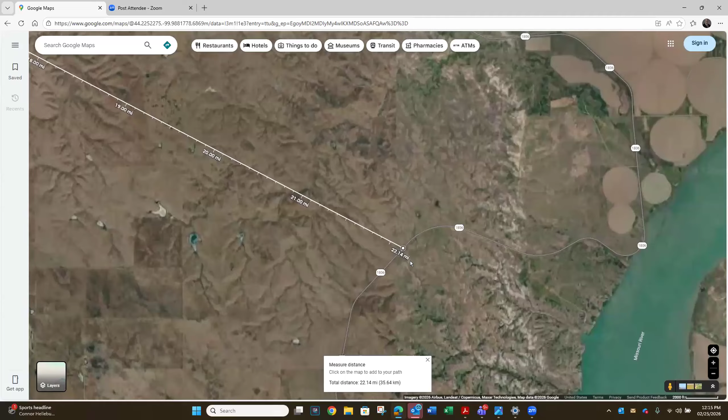The problem with what I'm about to show you is where we put this—what we call a Wyoming snow fence, because we adopted it from Wyoming—is in a location where we don't have data, which engineers desire to justify the cost for a project. It really came down to maintenance sharing with us that this continues to be a problem area. South Dakota 1806 comes south out of Fort Pierre and continues southeast. There's an area I'm zooming in on, and I'll show you where our physical snow fence went in, where staff continued to tell me it was presenting a tremendous problem for them.

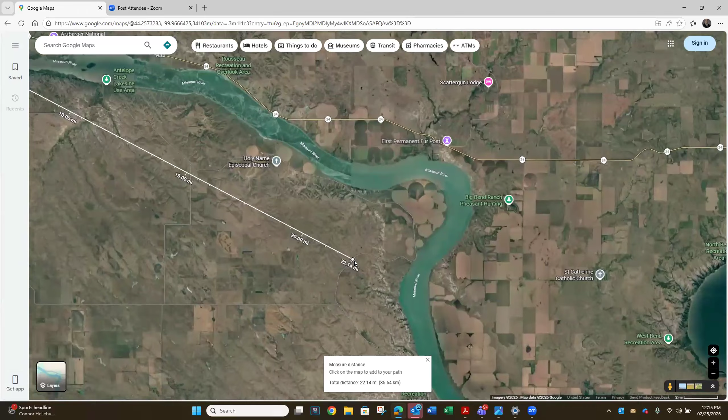The route they run, I'm zooming back out, hopefully slowly and not making you dizzy, is about a 50 mile one-direction route, one truck, one snowplow. This is about mid-span on that route where I'm zooming in. What would happen is not only could you not handle two-way traffic, they couldn't even handle one-way traffic—it would blow shut, much like Danny said. So we had stranded motorists here.

Part of my job is to help folks like Jared get all the toys he needs: a six-wheel drive snow plow, a road grader, different chemicals like magnesium chloride or calcium chloride, or we work with a farmer to put up snow bales here this winter, or pay a farmer for corn rows for drifting, and we do an agreement.

This location I'm zoomed in on was really handicapping our crews. We were spending tremendous time in this roughly 1 mile stretch, and it was killing our ability to service the rest of the route. So part of my job is figuring out how to help staff get up and down the road so they can serve the most customers.

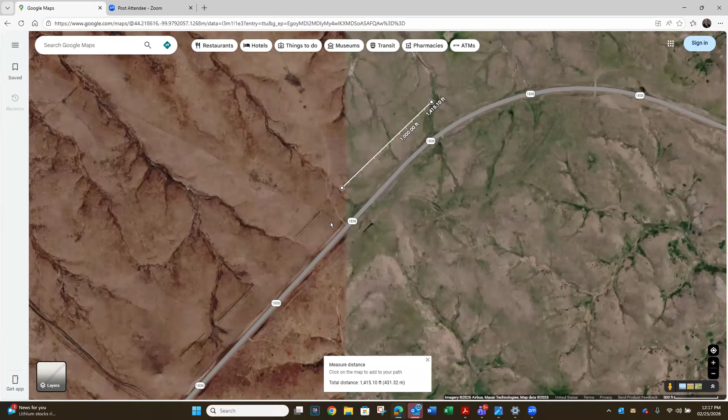What you're seeing in plan view, I'll trace it here, is the fences. I'll zoom in so you can see them up close. This is one stretch of physical snow fence we put in. We started working with the Lower Brule Sioux tribe, who were strong advocates and proponents to work with us since it's land they own. Danny Varlick, who introduced this presentation, helped me by evaluating wind direction and how it channels through.

Zooming in, when we would actually get folks stuck, there were half a dozen locations that would drift solid. If you look at the height of the road to the right versus the left, this would be extreme solid snowpack.

It took us 2 years to bring it to fruition, but we built what we call the Wyoming snow fence, based on wind direction and locations where Danny evaluated the contours would be a good angle to intercept it. Danny, I'd like you to correct me or affirm what I'm about to say.

Typically our drifting ratio is about 250 to 1, so it was also critical to study the contours and the offset. True, Danny? That is correct. Just an interesting point there.

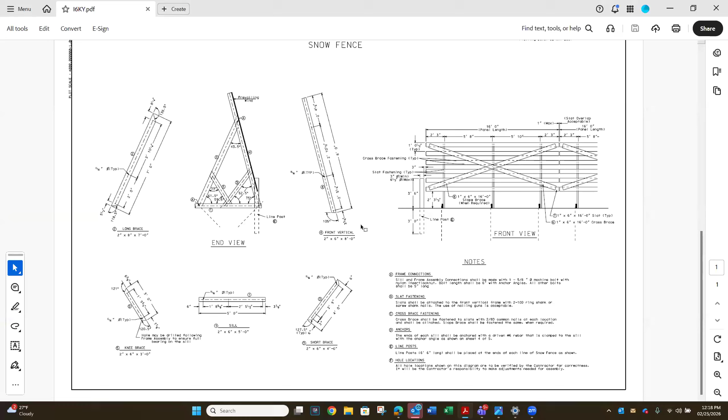I'll show you a close-up from our plans. This is actually a very simple A-frame that's 8 foot tall. We let it to contract, and we had to secure the right of way to do it. The Lower Brule Sioux tribe was wonderful to work with, and strong advocates to help patrons get to and from home.

Going back to the big thing you saw: this snow would pack in here so hard that all the toys we'd give our maintenance crews, we were ramming it with a 6-wheel drive, ramming these areas with a blade and not able to get through. I'll show you a photo.

Danny mentioned 2022. This is how hard-packed the snow is. I am not a small guy, but I won't say I'm huge — I am 6'3", 230, and you can see the indentations I'm leaving on the snow. That's the exact same spot and the butte where our snow fence stopped.

For us, the results were immediate. We had a tremendous 2022 blizzard, and we got this in just prior to the next season, and it was crazy how positive the ramifications were of the snow fences. Now the drifting was massive, and one of the things they wanted me to comment on was pros and cons. We put a perimeter fence around because these are pastures farmers rent.

But the drifting was so extensive it actually crushed the perimeter fence, such that cattle came in and started rubbing on our Wyoming snow fence. Crazily, they broke a good 20-30% of the members, and our maintenance forces had to go out and reestablish them.

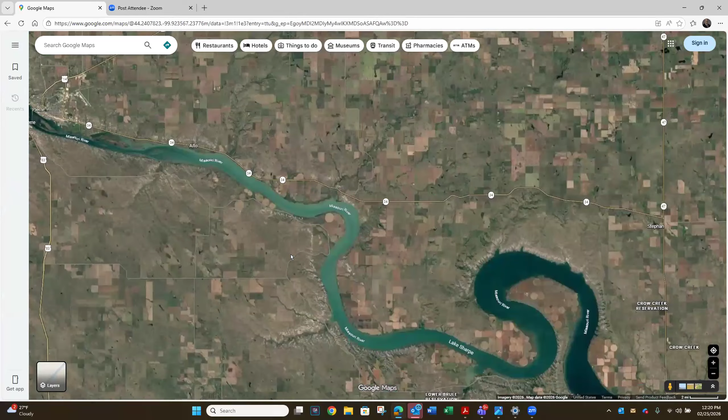The last thing I'll mention is this isn't something common to me — I'd say in western South Dakota they use these wooden snow fences fairly prevalently, and obviously Wyoming is the name we stole it from. I've seen them out there a lot. Another consideration, and I'm about wrapped up here: we have another location where we had tremendous stranded motorists as the snow flies. This is US 83 to the left.

We wanted to do a living snow fence at the location I showed you. But the problem was the soils along the river were so terrible that when we talked to agronomists, they said it would be very infeasible to try to maintain a living snow fence in these heavy clays deposited along the river.

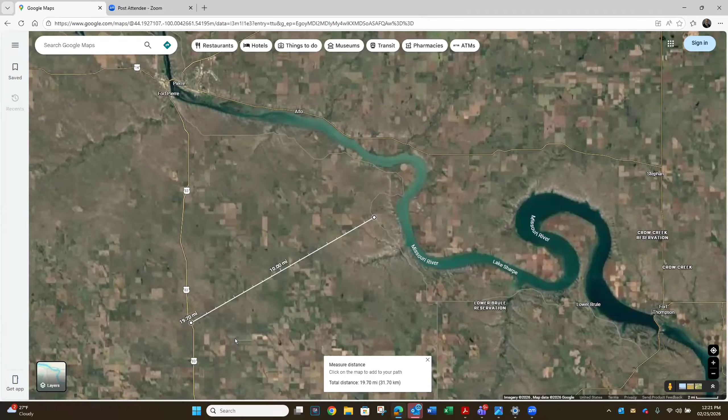As you see, by line 20 miles by the crow flies, soils have changed dramatically. This coming summer we have worked on this, and Danny has helped me with this as well. We'll be putting roughly 4,000 feet of living snow fence.

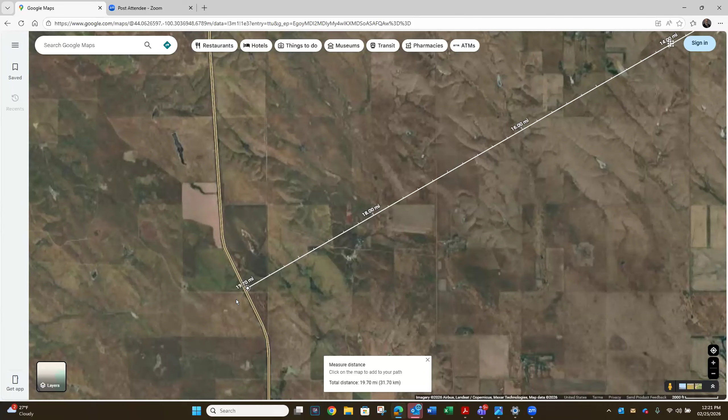I've worked with DNR and a local conservation district, who will install it. Our maintenance forces will water it. The cost of the living snow fence will be around $20 a foot for roughly 4,000 feet. Our wooden snow fences that I first showed you in 2022 went for about $80 a foot, so that gives you some comparison.

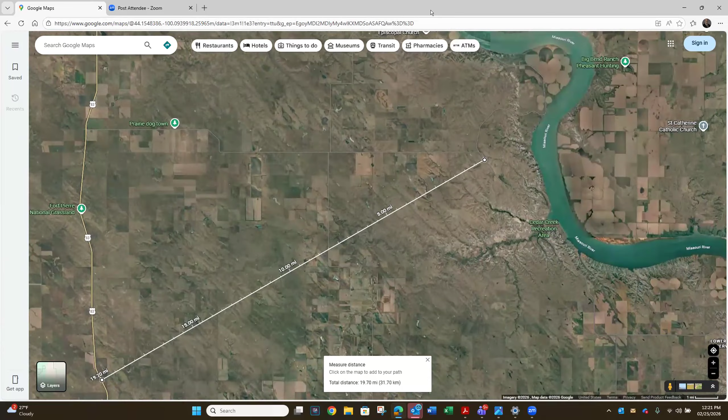Again, it's really just trying to help maintenance forces do the greatest impact they can by getting up and down the road. So that's the extent, very quick and dirty, of the snow fences we put in. I'll turn it over to Jared Fosham, maintenance supervisor in Hayes-Phillip.

Dean, while Jared's pulling up his PowerPoint, we did have a question that makes sense to ask now. In that discussion you mentioned a 250 to 1 ratio, and someone's wondering what that ratio represents. It's basically the rate that snow drifts.

If you put the snow fence too close to the road, these are long, flat slopes because they're normally wind induced. So if you have an 8-foot tall snow fence, for every foot vertical, the drifting is going to go 250 feet horizontal. When Danny helped us set the distance away from the road, that was taken into account, so you don't have a massive snow fence so close to the road that drifting actually goes over the road instead of stopping prior to it.

Yeah, and Dean, I can add to that. Typically the design standard is 35H to your center line. With the amount of snow and how far it carries with nothing to protect it, we had to redesign this one, because if I'd just used the normal height and normal calculations, we still would have had some issues.

This one I took on my way to work, I've got a 26-mile commute in the mornings. You can see the road surface is actually pretty good, but this is a bridge right here where it drifted in. Just as you guys are aware, even getting to work can be a challenge some days.

To me, visibility is the most dangerous part of blowing snow. Snow and snow drifts on icy roads are something you can deal with, but it's hard to deal with things that you can't see.

Thankfully, there isn't a lot of traffic out when conditions are like that, but there's still people there. There's been times when visibility gets poor like this where we have pulled our plows off the roads. Me personally, I leave it up to each individual driver, as they know their conditions, they know their capabilities and their comfort level when out in these conditions.

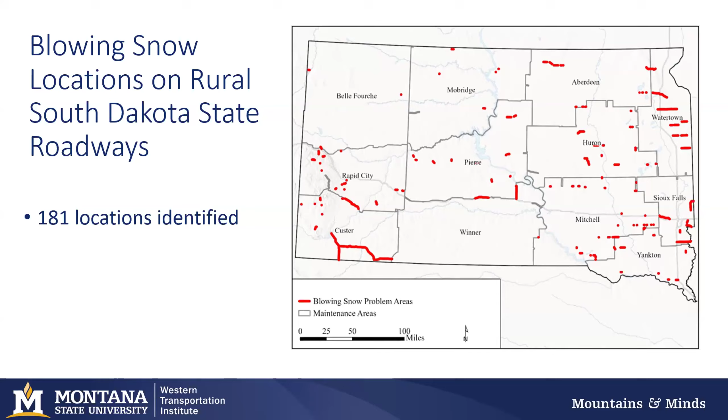So there was a lot of work to make sure we accurately captured what was being told to us for this effort. Ultimately the goal, as part of this project, was that South Dakota wanted to understand what were those top 100s. So I'll go to the next slide to share a little bit about how we prioritized that.

These 6 data sources were the ones we ultimately used. We did consider other ones, but for a variety of reasons they may have been put aside, kind of those incomplete data sets and so forth. Let's step through these a little bit. Again, maintenance area feedback was instrumental to identifying those locations as a whole.

When we thought about how we were going to prioritize it, you heard about crashes and incidents. It was actually in conversations with the maintenance area where they identified slide-in data - the experience where you might not have a crash report, but maybe someone hit blowing snow across the roadway, went off the roadway, but there's really no damage, they were able to be pulled out. So it's not necessarily going to generate a crash report. We tried to integrate that along with the crash data we had as well.

We looked specifically at crash data regarding blowing snow, and then winter weather, which was more encompassing than just blowing snow - so sleet conditions and so forth. Winter road conditions, that variety of snow on the road or slush, to really try to integrate how this might be captured within crash data, which isn't necessarily cut and dry. If any of you have worked with crash data, you understand that in more detail.

So that was looking at crashes - we had data from 2014 to 2024, so just under 200,000 data pieces. And for the slide-ins, a lot smaller, just under 1,000. That provided the risk experience associated with blowing snow itself.

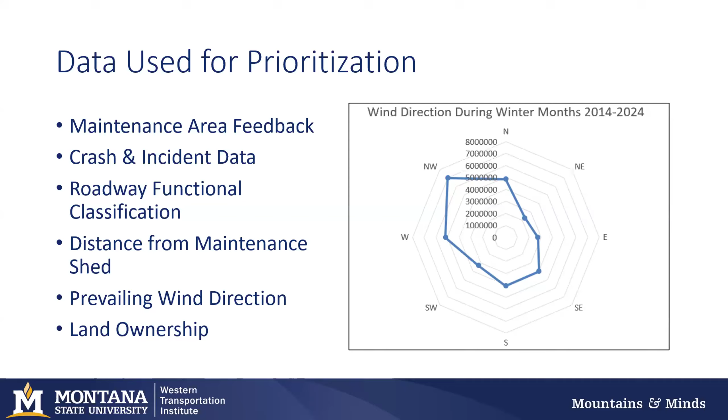But ultimately, and I'm sure Danny will allude to this a little bit, you might implement one in one area if it fits in a budget, or maybe another. But they know within the top 100 that these are the ones we can address in the rural areas. These can really bring a benefit to those trying to fight blowing snow across the state. Next one.

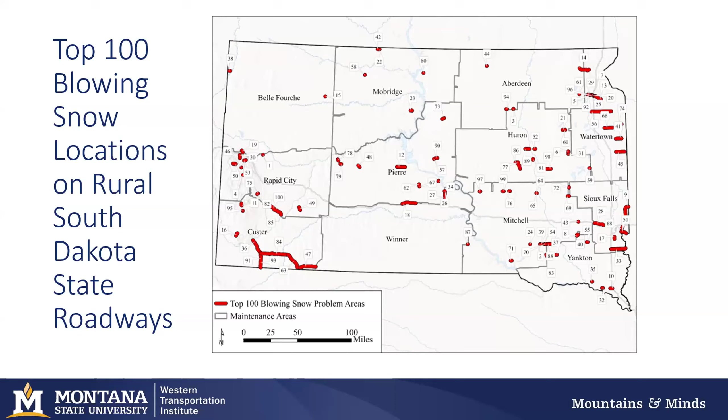So the last slide that I'm going to share with you, and then Laura's going to dive into the guidance document that was created as part of this, is ultimately the report I mentioned will be available at this website, and you can find the nitty-gritty details of the prioritization process if you want to learn more. So Laura, I'll pass it off to you.

Great, thank you Natalie, and thanks everyone else who's helped present this work. So the last piece of this effort was we identified these 100 sites. Now, what can we do to help support implementation of snow fences or blowing snow mitigation at these sites? So we came up with a guidance document. The general outline is: what are all your options for blowing snow treatment mitigation, and then how do you know which one is going to be the right one for that location? So those are the pieces I'm going to talk about next.

So there's been a lot of talk of different snow fence types, so I'm going to run through some pictures and concepts of what those are. So a Wyoming snow fence was mentioned already, this is a picture of that. This is a structural snow fence. Structural snow fences are typically made of wood, polymer, I-beams, basically any permanent type material. They can vary in height from 4 to 14 feet or taller. They are typically anchored well - you don't want them tipping over, blowing over, or getting moved. And as mentioned already, Wyoming has quite a few of these, which is why it's called the Wyoming snow fence.

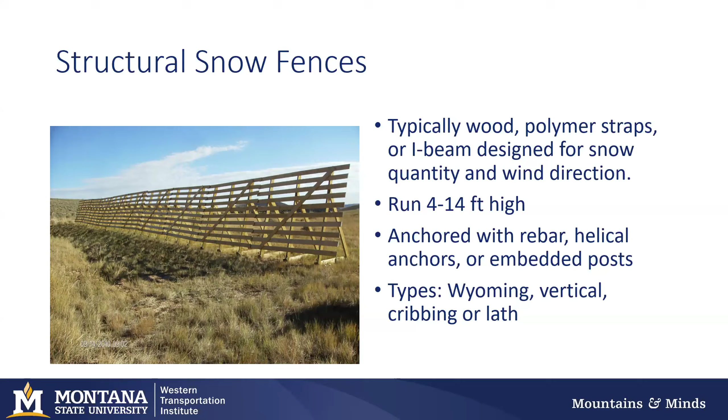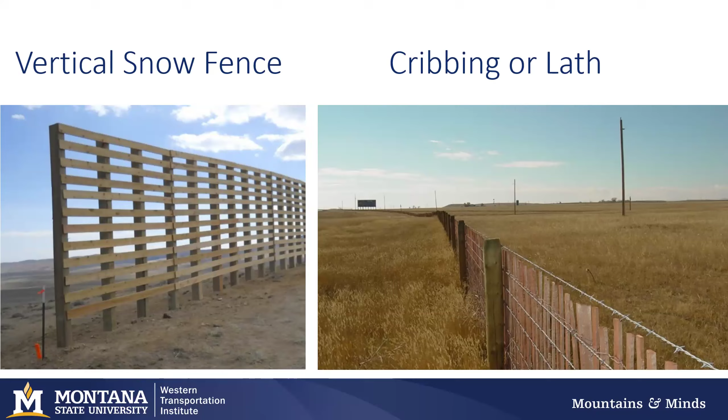But there are other ones that I'll show next. On the left here in this image, we have a picture of a vertical snow fence. This might be a good option if you don't have, for example, permission to put something as large as a Wyoming snow fence on the property. It will behave differently, but it's there to help you as another option. Another example on the right is cribbing, which is commonly used also as temporary fencing. In this example, it's put right on the right-of-way fencing. So that is another option as well.

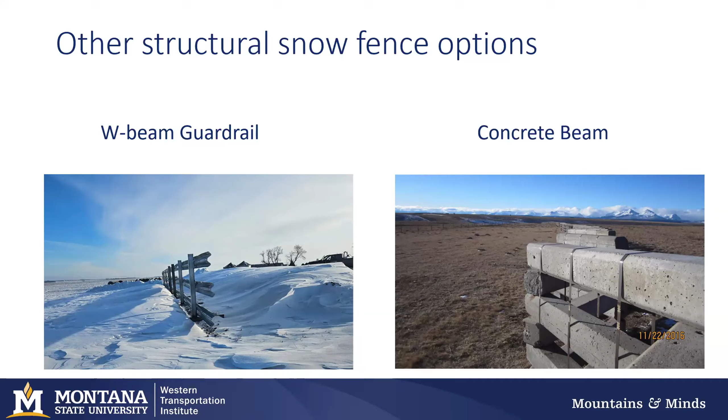For the purpose of this project, we talk about temporary snow fencing in 2 different ways. It's kind of a catch-all for some type of snow fence that will not last that long, or that will be set up and then taken down or moved seasonally.

This next slide shows more examples of what temporary snow fence may be. You can get very creative. You can put plastic snow fencing on a more semi-permanent wood frame structure.

And then on the right-hand side is something called a snow snake. This is an example that was developed by Tabler. It's a woven hoop, basically, that is used out in a field to catch snow. It's something you could build, purchase, or install if you're interested.

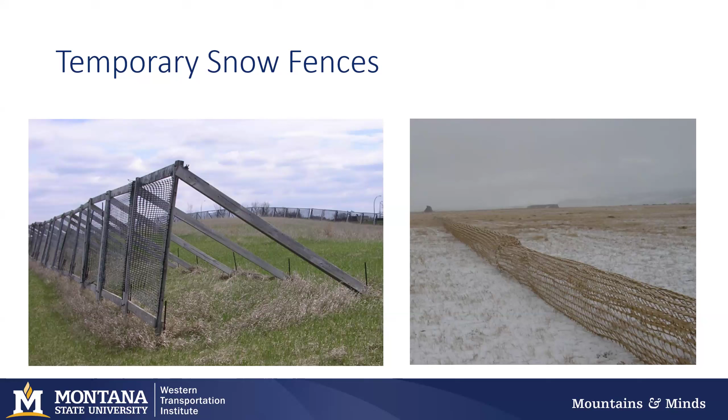So just a lot of options out there. There's already been discussion of living snow fences as well. These are seen frequently across the US. They're typically a combination of trees and shrubs, 1 to 3 rows deep.

As you get into building these, there are great design manuals out there that will tell you this, but it's really important to consider the height of the plants at maturity in your design. And then as you wait for those plants to grow to maturity, you can have a structural snow fence in place, as shown in this picture.

At this time, the structural snow fence is doing a lot of the work here as those plants are growing up to maturity. And then this is an opportunity, and also a challenge, to work with landowners and conservation groups for permissions and also maybe help.

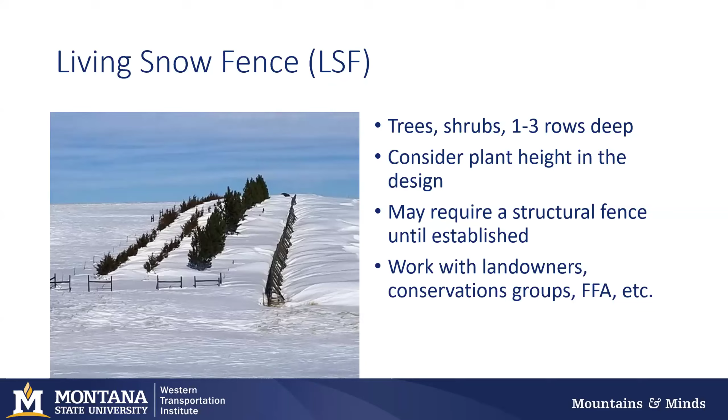And then there's also opportunities that we talk about in the guidebook for groups like FFA and others harvesting corn from these living snow fence areas to help create more community understanding and participation.

Earthwork grading is an option, and it was mentioned. Dean talked about this. Basically it's an opportunity where you can cut back your slopes and create flat bottom ditches to prevent snow from drifting onto the road and also create more snow storage. So you're modifying the topography around the road to help reduce snow drifts on the road.

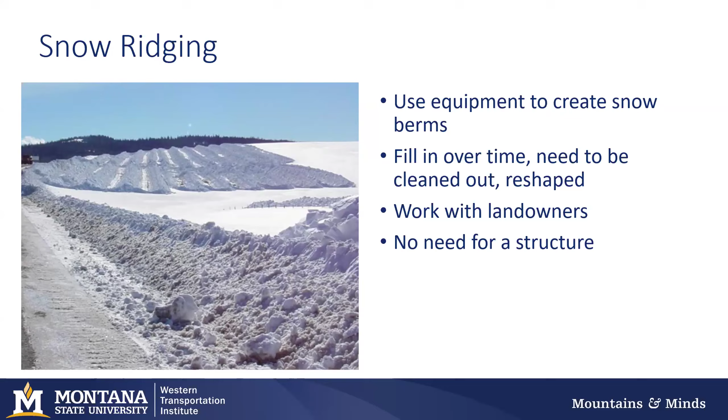And then just some really creative options that are out there. There have been 2 solar snow fence projects. They've effectively shown that you can capture enough energy to run, for example, an RWIS site or power a structure. So if you have a remote location that you need to power, maybe an information site out there, this might be a good option.

Another example out of Wyoming is creating floating structural fences so that you can put these over utilities and you don't have to worry about the rebar cutting into the utilities as you anchor them.

So knowing all that, these are just general snow fence or blowing snow mitigation strategies that are out there. We also wanted to help the DOT understand maybe what might be the best option for them.

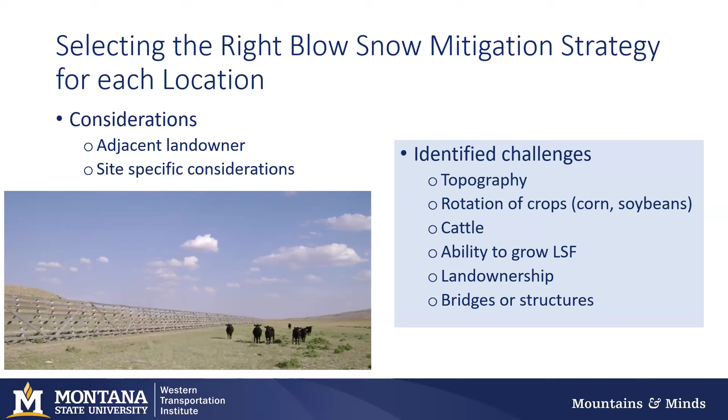And then again, bridges and structures can actually create drifting situations. So how do you either fix that or prevent that from happening?

And other site-specific considerations that we talk about are design. We talk very generally — there are really good design manuals out there for structural snow fences and for living snow fences. We reference these in the guidance doc and in that final report.

Maintenance is critical, and we talk about that in detail, because you can go through the effort to design and build a snow fence, but if those cattle come in and pop off some boards, it's not going to function as it was designed to.

And then soil, geology, terrain — these all come into play, as mentioned with Dean, that 250 to 1 versus 35 to 1 ratio, that's critically important. So again, each site investigation needs to consider all these factors.

Land use planning is something that we also looked into. If you know, for example, a large box store might be coming in the next decade, you might want to think about a short-term solution, knowing that the way snow moves is going to change with larger structures.

A piece of this project that we didn't have the data to support additional analysis on was actually looking at wildlife migration and presence. Snow fences can actually help create habitat for wildlife, but they can also block migration paths. So it's really important to understand where these animals are moving and how frequently you need to create gaps so that they can get through.

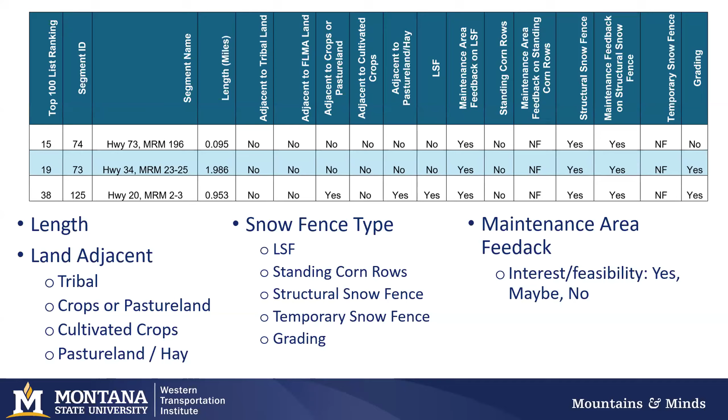So looking at all this, we also wanted to know about cost information, and Dean did a great analysis and presented some of that. The literature on cost information for snow fences is dated, and it wasn't great. So what we were able to get out of it was how many years are these different blowing snow mitigation strategies effective, and so we ended up using that in that life cycle cost framework that I'll talk about next.

As well as identifying some of the benefits that come out of this, which are: if you can prevent a snowdrift from being on the road, you're improving safety. If you're using a living snow fence, you're encouraging carbon sequestration. If you're using a snow fence, you are reducing emissions, you're providing cost savings, and you're reducing winter maintenance effort and de-icers that are going out there, because they don't need to go out and treat that site over and over again. And again, potentially creating wildlife habitat.

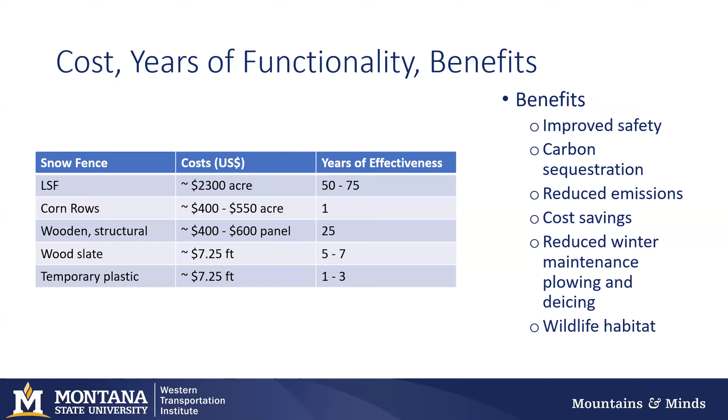So this life cycle framework that I alluded to, it's an Excel-based tool. It's designed specifically for the DOT to use to input all their data into. And there's some set costs that were given to us, but are modified—they're able to modify them.

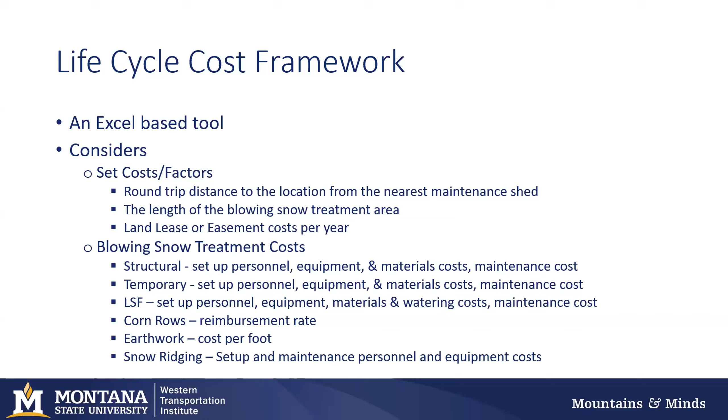So what is that round trip distance from the shop to the site? What is the length of that blowing snow treatment area? And then what are the base costs for either the land lease or the easement? And then for each blowing snow treatment strategy, what are the costs and the effort that we're looking at?

Maintenance costs considers if it's, for example, a structural snow fence, going out each year, doing a walk or a drive of that site, making sure there's no boards missing and what have you. And then you can enter in the costs for any additional boards or rebar or whatever you need. Land use and easement costs, this was provided by the DOT. And then crop reimbursement rate was also provided by the DOT. This can either be by bushel or acre.

But with that being said, structural snow fencing and snow ridging are also very viable. Temporary snow fencing is great for a short-term solution, but it is expensive, especially if you're using that plastic sheeting, and it's only going to last a year. You have to go out seasonally to set it up, take it down, replace it every year, and that adds up over time.

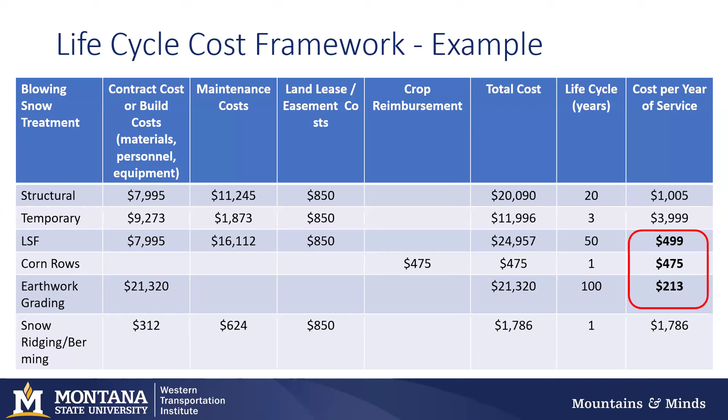So we created that tool to help them, and they actually said, can you do a cost benefit tool as well? So we took a deep dive into this, and what we found was that there are actually two really good cost benefit tools that exist out there, and there's no need to reinvent the wheel. So we provided the links to where these tools can be accessed. One of them is specifically for living snow fence, and the other one is for all snow fence types.

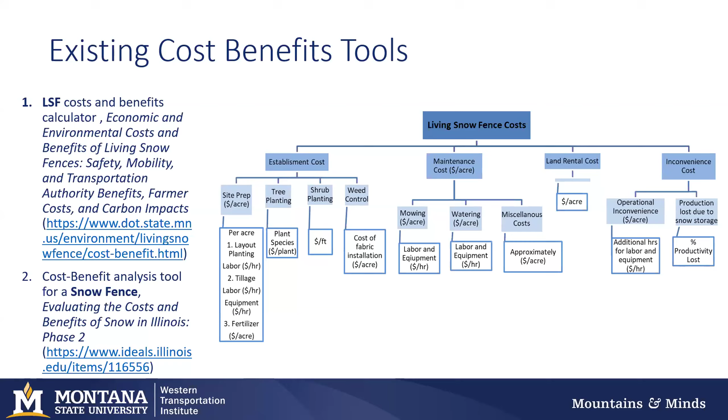But the framework here shows you all the different costs that go into it and then the benefits that are considered. And I highly recommend, if you are interested in doing a cost benefit of your snow fence program, that you look at both these documents, because what this framework is showing you is kind of a merging of these two options. So with that, I will hand it back to Jamie.